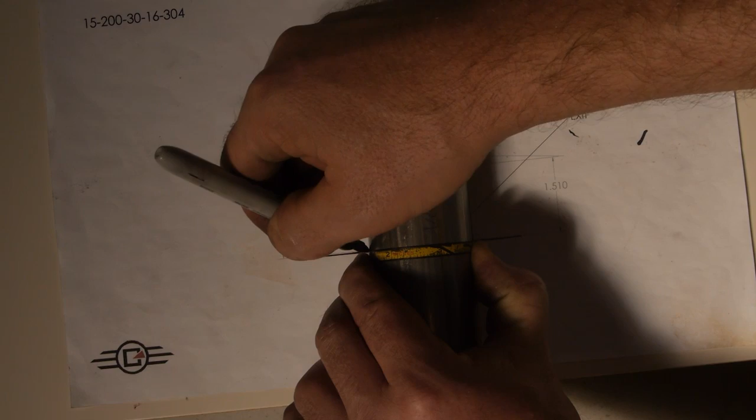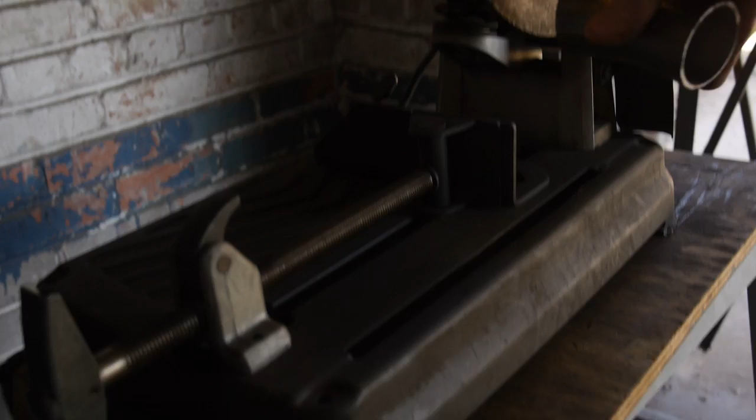There was a period of time in this great country when industrial and mechanical design changed and morphed in a very rapid and explosive way. Decisions were made, men took the risk, they went with their heart and put everything into their designs, and they weren't afraid to put something out there that might give them a little butterfly in the stomach or make them a little nervous. They really were pushing the boundaries of design.

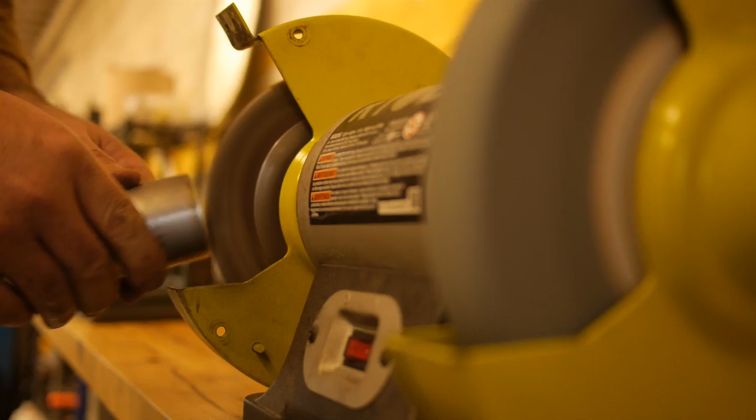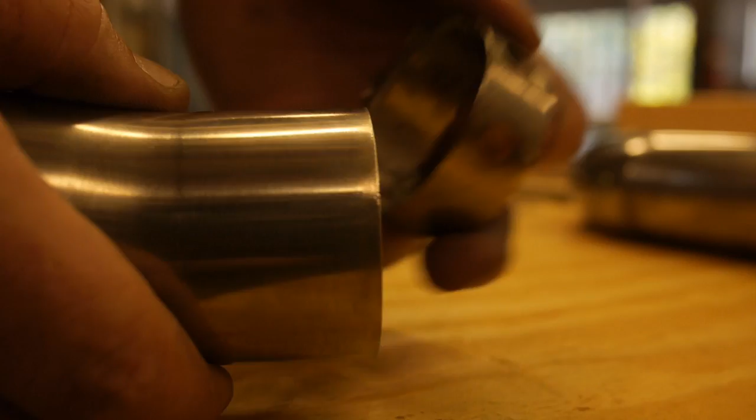For me personally, that is a product of a culture that I call the American way. And the American way is what I would like to amplify, get the bugle out and blow for with Confederate Motorcycles. With these 4 or 5 new motorcycles that we can make every year, I hope it becomes contagious. I hope a lot of people will come in and copy us.

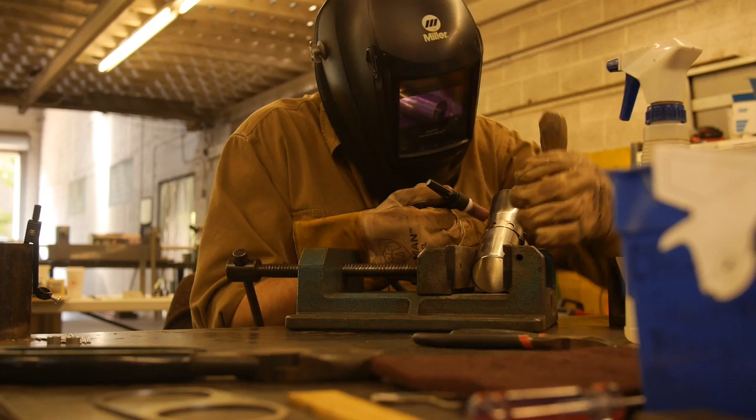Our company's always going to be anti-scale. We'd like to grow the company to say 300 or so units a year, but not really beyond that. This is about free-form, handmade craftsmanship and rough craftsmanship, and first and foremost it's a design-driven exercise. I know we can achieve the numbers we're talking about. The key is the products themselves are going to sell themselves. That was always the vision, design-driven and product-focused.

We're getting ready to grow a little bit. It's going to be exciting.

You ready? All right. Well, tonight we're gathering together here to talk a little bit about our new strategy. This is something that I've worked on with Jay Etheridge, our CFO. We have nailed it. This is something we know we can do. It's a very simple strategy to move from 1 bike a week, which is essentially where we've been.

We built about 1,000 bikes in 20 years. It's a 25-year brand, and we want to move to 2 motorcycles a week. Not a terribly difficult thing to do when you understand that only about 2% of the marketplace has brand awareness of Confederate when they go in to buy their new Harley, their new Ducati. And we can ramp that about 5 times with the strategic plan we've got concerning new model launches that will occur every 8 to 12 weeks over the course of the next 3 years.

And then beyond that as well. We've got about 3 years of these products that our wonderful design team of geniuses will be showing in a few minutes. These amazing new motorcycles that we're going to be bringing out over the next 3 years.

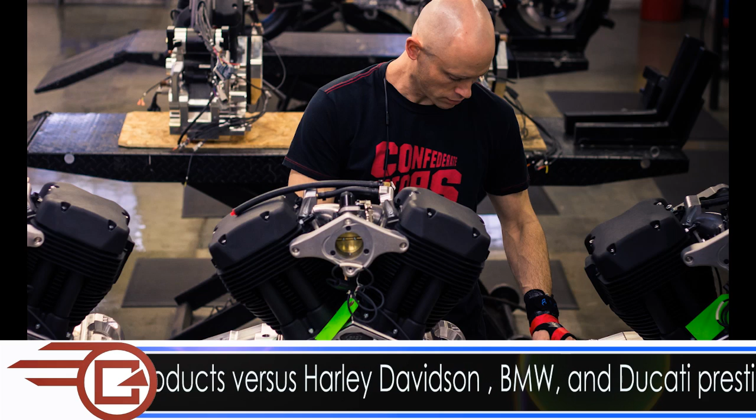For the purposes of where we stand right now tonight, we've just issued a purchase order concluding something we've worked on for many, many years, and that is a Tier 1 chassis vendor. This is a vendor that will bring in about 200 machined bits at one time as complete chassis kits. This changes the landscape of how we build the motorcycles and how we're able to evolve the design of the motorcycles.

But let's take a look up at the board. What you see is the 2 motorcycles, the 2 fighters, which are EXP 1 and 2, in the month of September, and then we slowly ramp up production in October to 4. And then we hit 8 motorcycles a month, or 2 motorcycles a week, thereafter.

This generates about $2.5 million worth of profit over the next 16 months. And this is with a $25,000 per month marketing budget and about $31,250 of design budget monies. This is more than enough money for this little company. We are the leanest bunch.

We mandate that the money we're going to take out is going to be from an award through our ESOP account to the heroes, the true believers within the company that make it all happen. We're going to make our money on the increasing stock valuation, not by taking it out on the front end.

These numbers are significantly bigger than we've ever spent on marketing and design. They will deliver on the plan that we're going to unveil tonight, and you'll see on a monthly basis that we just continue to generate money.

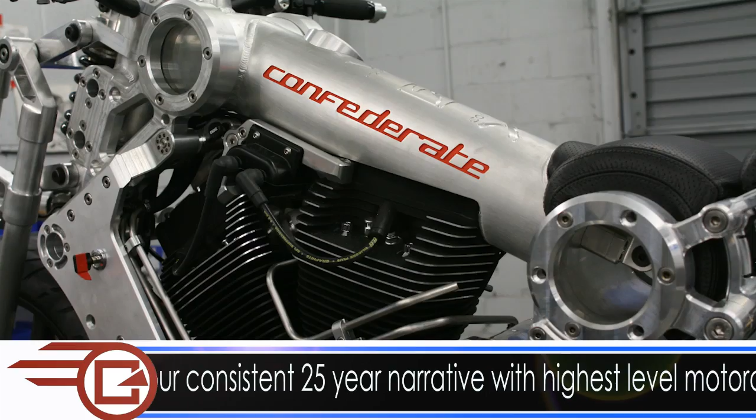We built 61 of the most powerful American motorcycles in history, and I doubt there'll ever be motorcycles this explosive again. If they do, they'll come from us with different technologies. But if you've always dreamed of having an air-cooled, big twin, big block American motorcycle, this is the one to have. There will not be a more powerful one.

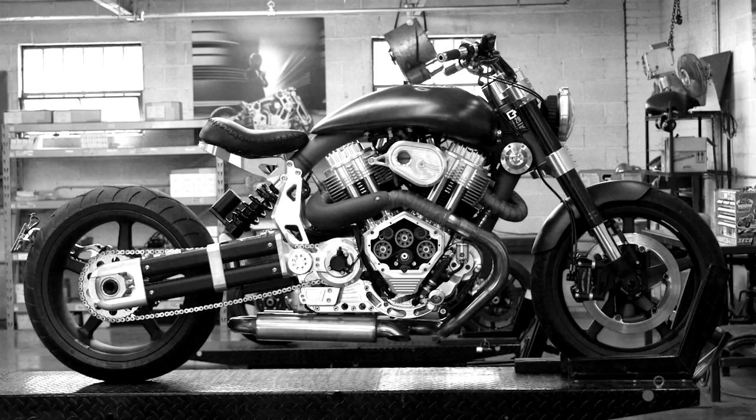Most importantly, what you're going to look at tonight is a plan where we repeatedly launch new product every 8 to 12 weeks, consistently for several years or forever. This goes back to the old 1950s and 60s American way of design, where you give the customer limited quantities of very special, unique motorcycles that are like nothing else. More choice, limited production, every motorcycle a true work of art, the art of rebellion.

My name is Andrew Ruther. I studied industrial design at SCAD and I've been with Confederate Motorcycles for about a year and a half now, started about March of last year. I've been a gearhead pretty much my whole life, worked on my own cars, and studied automotive technology in high school. Basically, you learn through that experience.

It's been sort of like a lifelong journey, and moving forward you can always learn new stuff, but there's no sense in reinventing the wheel. If there was something successful that they had done back in the teens and the 20s, and we can bring that back into a modern design, I think that's exciting.

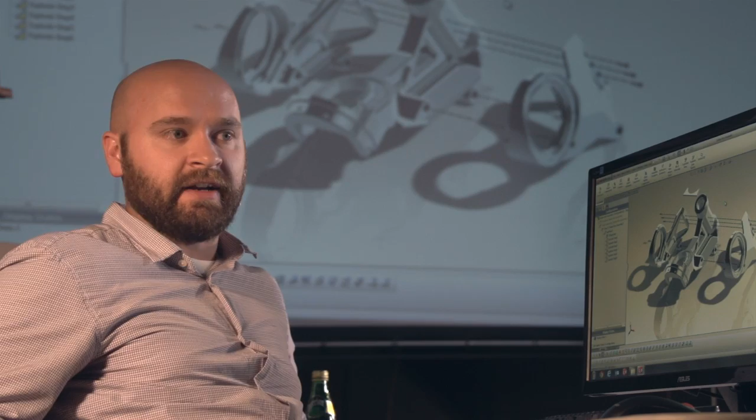I really can't wait for the future because this is just the beginning. We can go so much more radical than what we've already done, even though this is a crazy bike.

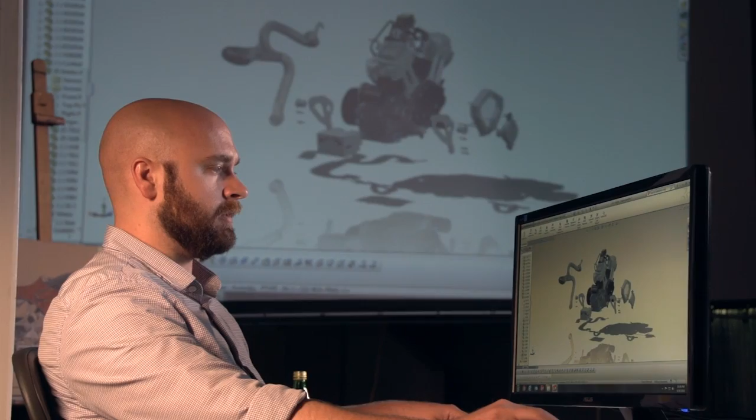Here we have just kind of an exploded view starting with the heart of the motorcycle, which is the brand new CX4 cases that S&S helped us develop. And you can see we're already fully integrating the downdraft intake manifold system.

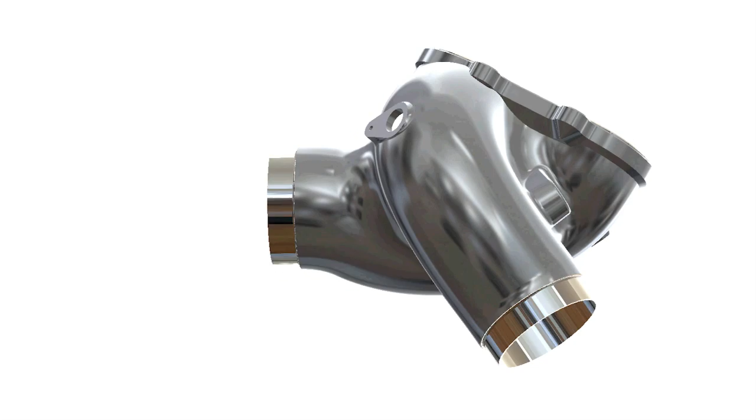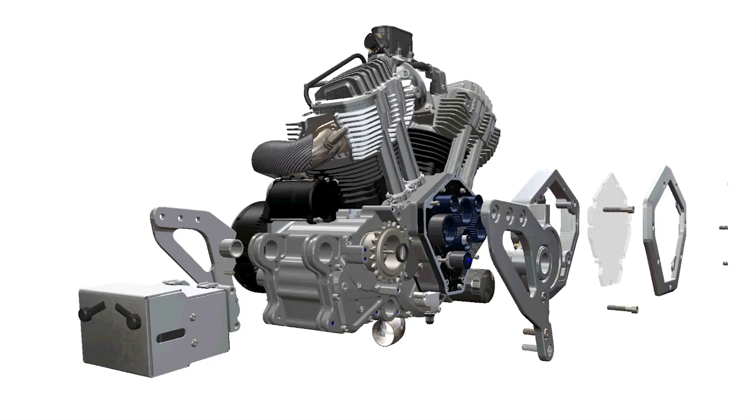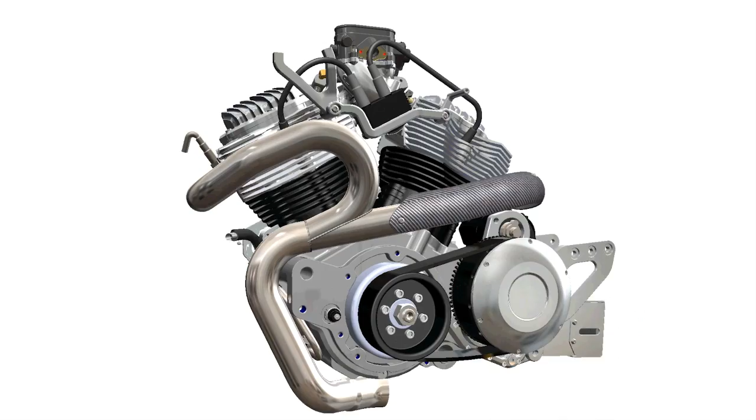We can show that in an exploded view with both a twin plate throttle body and the twin independent downdraft intake manifold, which will actually be cut from a solid block of billet aluminum, 6061, on a 5-axis billet machine. Once these things come together, we can put that right onto the engine, and you can see we started to incorporate an equal length header system that's more elegant and simpler to manufacture. We've already incorporated a heat shield that'll help with putting this thing together and keeping the rider comfortable.

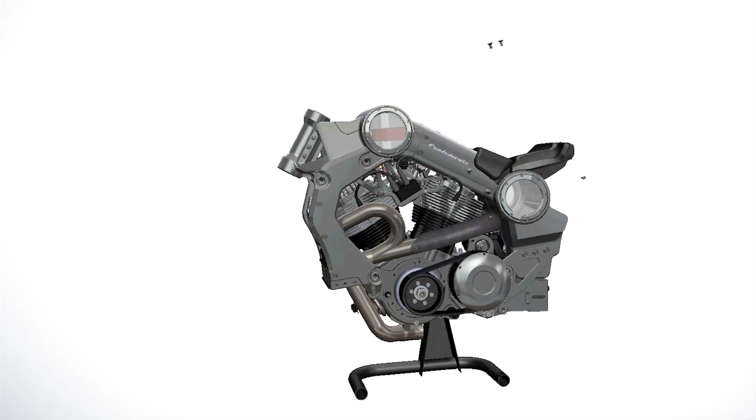Once we have this whole entire engine package incorporated, we go back over to the engine and can start putting this thing together. For the chassis, it comes together in a multitude of pieces, but it's the first bike where we've actually fully incorporated a structural air box.

This is where we're able to incorporate structure, the air volume to bring the actual intake noise down, and producing the actual air volume that we needed to produce the horsepower we wanted.

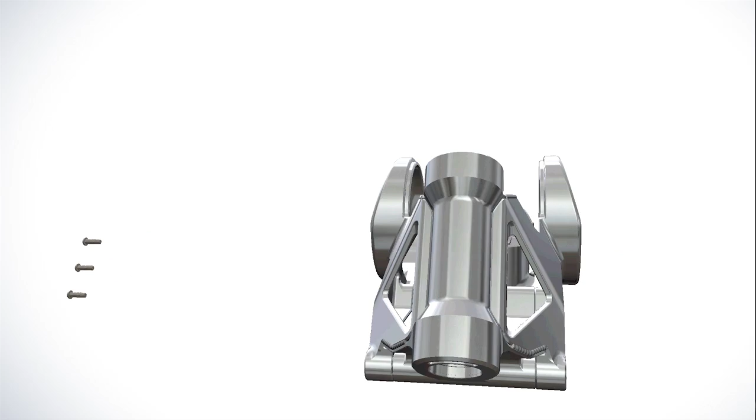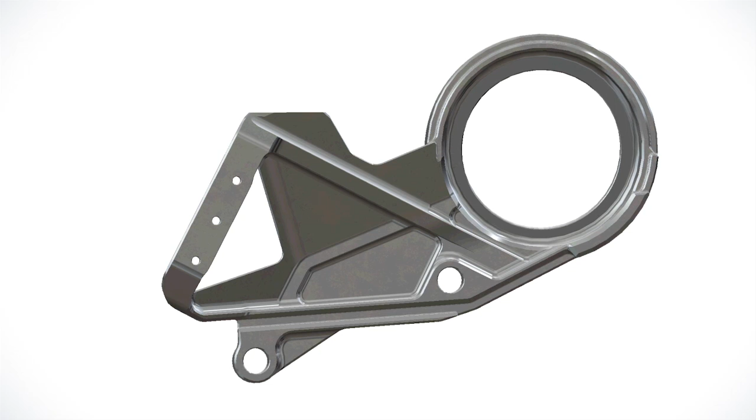Here we have the intake. Well, it's actually three pieces. If we were to look at one individual piece, we can show you how individual components are manufactured: you have one op, then your second op, where we basically cut out the whole interior section of one side of this intake box. And then our final op, which is basically just the air window, which we can remove to get better airflow for, say, a salt flats application, or close it off for a quieter, street-friendly version.

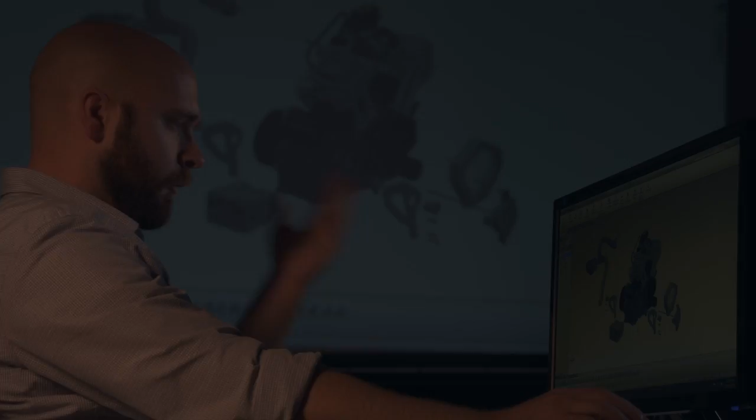We briefly discussed the Creo platform and how individual components are brought into it to marry the whole bike together. So we start with the engine, because without it, we can't build a bike.

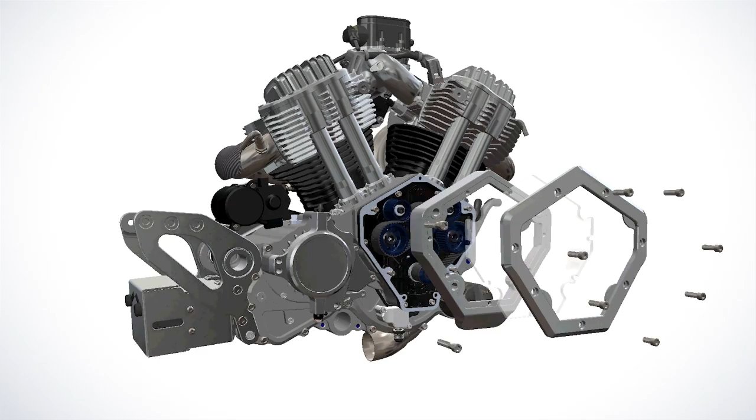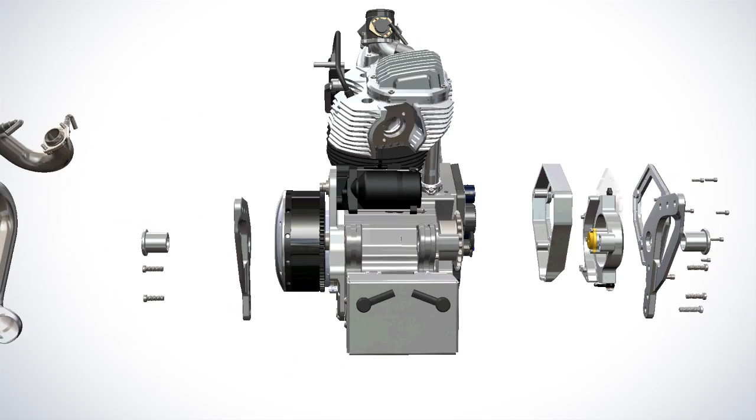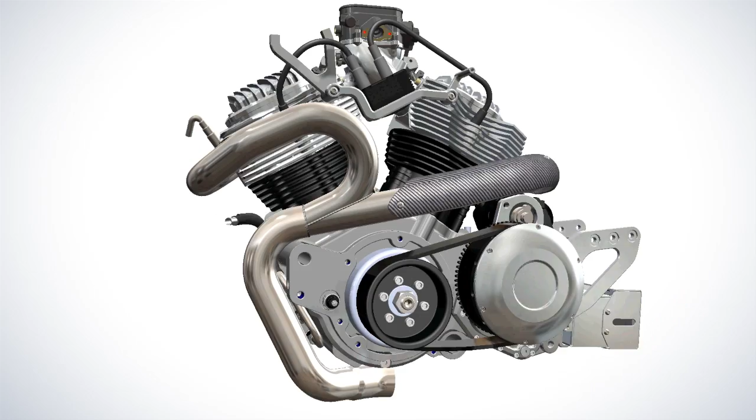We pulled away the slave cylinder, that's an individually machined CNC billet housing. There are the rear supports, our battery case, and our equal length header system that leads right into our MagnaFlow exhaust. So we'll put all this together and start building a motorcycle.

My name is Jordan Corneal. I've been with the company for almost 3 months now. Real excited to be here. It's always been a dream to work at Confederate.

One of the first projects Matt put me on when I got here day one was starting a sketch program on different trim levels or different variations of the P-51 fighter, different models that can excite different groups of people. This first sketch is an early sketch of a chopper variant of the P-51 fighter. It's got a lower scooped out seat, so we removed that rear circle to lower the seat. We'd put forward foot controls on it, higher bars, a more relaxed, comfortable position as opposed to the sportier cafe style sport position.

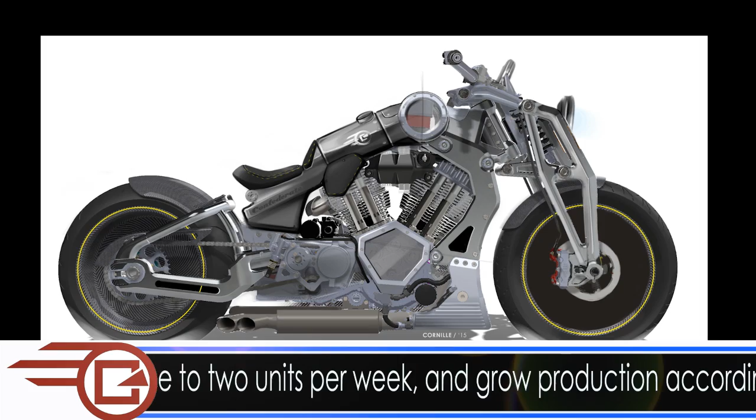The other variation of that variation would be the bobber, which would be essentially the same bike as the chopper, with a fatter front tire, a look that we believe a lot of gentlemen would prefer. So that gives you 2 options within that sub-brand of the fighter category.

The other variation we're working on is more of a cafe style fighter, a straight across, straight line, more of a European style fighter. So that's this bike right here, and just like the chopper, it would be offered as a sport bobber version with a fatter front tire, but otherwise it'd be the same bike. So you get 2 different looks from the same model, and we think that's advantageous for us, offering our customer more styles with essentially the same bike.

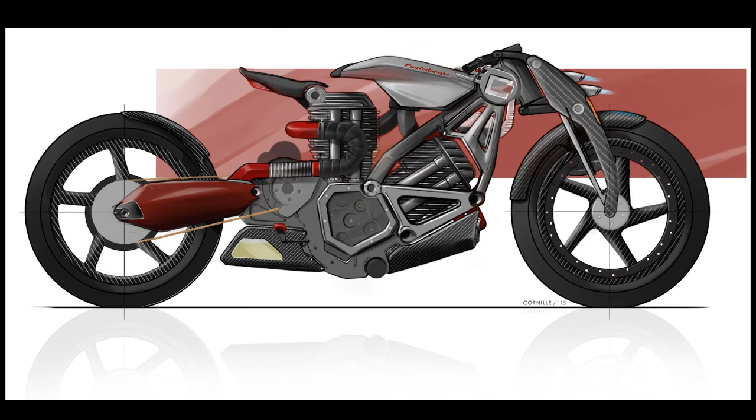The second project, the one I've been working on for a couple days now, was a really cool project for me. I came into work one morning and Matt brought me back to his office, and we had been working on this V-twin engine that's slanted forward with some horizontal fins, a real aggressive, cool look. Matt told me to see what I could do with it.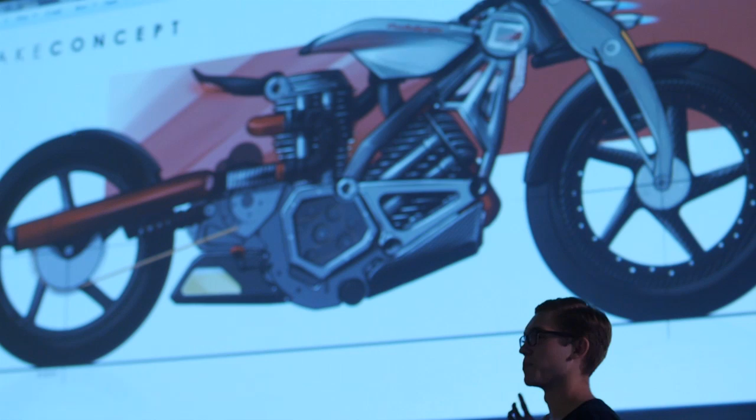We looked at the old Confederate concept, the Renovatio concept, and I was looking at G2 Hellcats with that exhaust swing arm, which I think is a really cool idea. So the idea behind this concept bike is something very lightweight and lightweight looking, with a lot of negative space, very open, very minimal.

What I did was slant the engine enough so that the rear cylinder is vertical, and I just put the seat right on the head of that rear cylinder, so there's no subframe or anything. We thought that could be a cool opportunity to explore new heat-resistant materials.

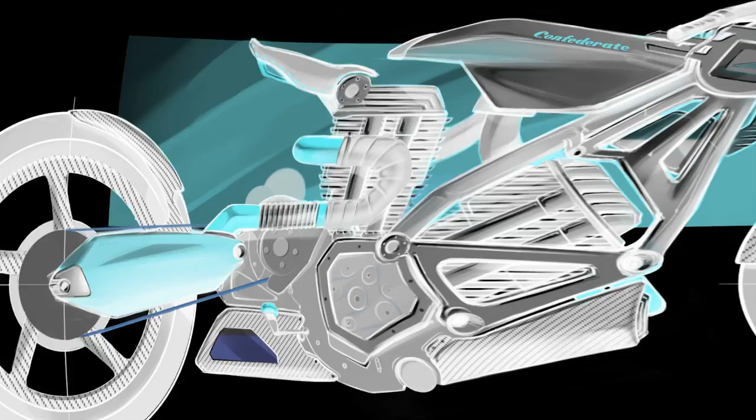In my opinion, it's just a badass bike. I don't think anyone could sit on this bike and not look cool. This is my vision of what a future concept for the company could be, something that's just super minimal. It doesn't have anything it doesn't need, and it just makes you look like a badass.

What I really like to do is make the new motorcycles. It's really almost childlike, almost like I want to go back and get on Santa's lap. I just want to make these toys. Sometimes I think, in the form of a story, I fantasize or imagine what I really want to do.

Go back to October 31st, Halloween night in 1967, when my buddy Keenan Mingert pitched me the keys to his 160 Honda on the fairgrounds in Prairieville, where we were hanging out with a bunch of really cute little girls. There was an area where you could ride his little Honda around real slow in front of these girls, and I just felt so empowered on that little black 160 Scrambler.

And quite frankly, I could jump on that 132 and bang around 2nd Avenue here, down the old drag strip for this town, which is right out in front of us. But it's not as special as that little bitty 160 was when I was 13 years old.